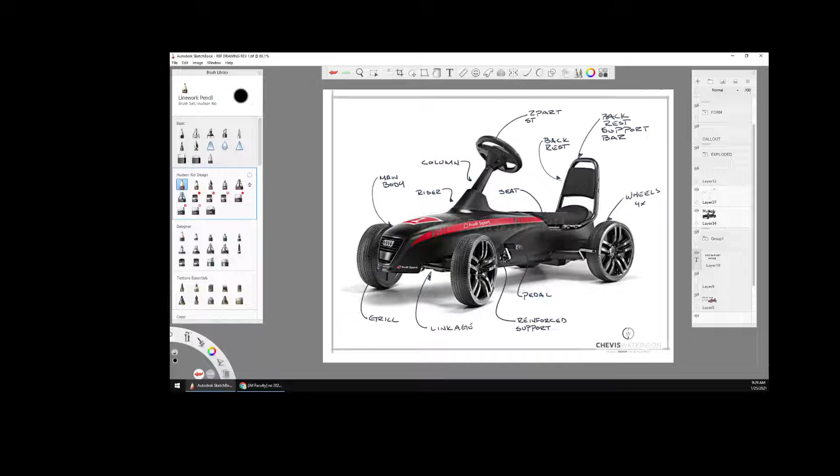as you model things, start keeping a logbook. So if this is your first time modeling this kind of a wheel, track your time from start to finish. The reason for that is, eventually if someone comes to you with something else very similar that they want to model, one of the questions is going to be, well, how long is it going to take, or how much is it going to cost?

And that's all equated to how long it's going to take you to do the model. If you have a reference book, you can go back and look and say, okay, I've done a wheel like this before, it took me about an hour. So that's the schedule I'm going to give, that's what I'm going to bill for.

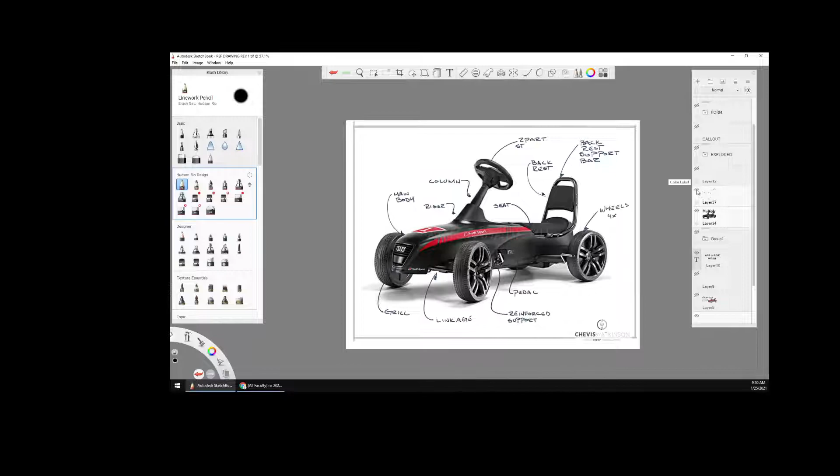Very valuable tool. Now, as we go on, what I'd like to do next is create a simple exploded view of all the components. Again, it's a nice, quick, simple thing I like to do. I don't necessarily spend a whole lot of time styling it or making it pretty. If I'm not putting this into a presentation deck, or if I'm just using it as a reference document, how much time do I really need to spend on it?

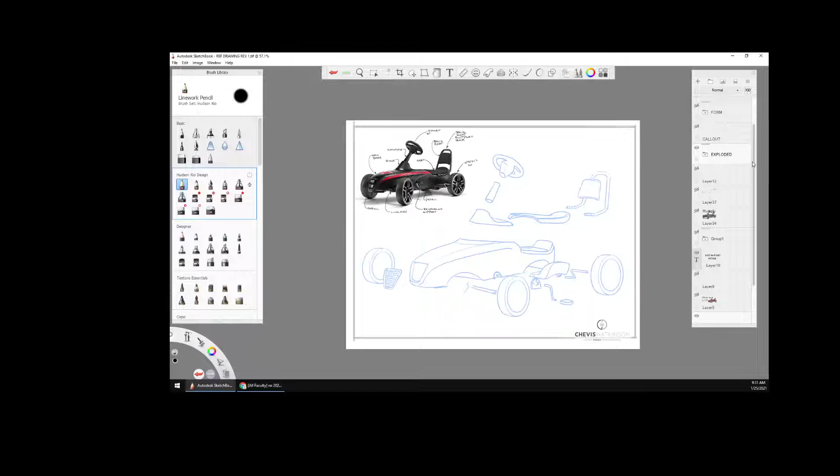So what I then do is, again, add the callouts. Now these callouts are different. What I want to know is what are the materials I'm using, what is the color, what is the finish, and potentially what is the manufacturing technique.

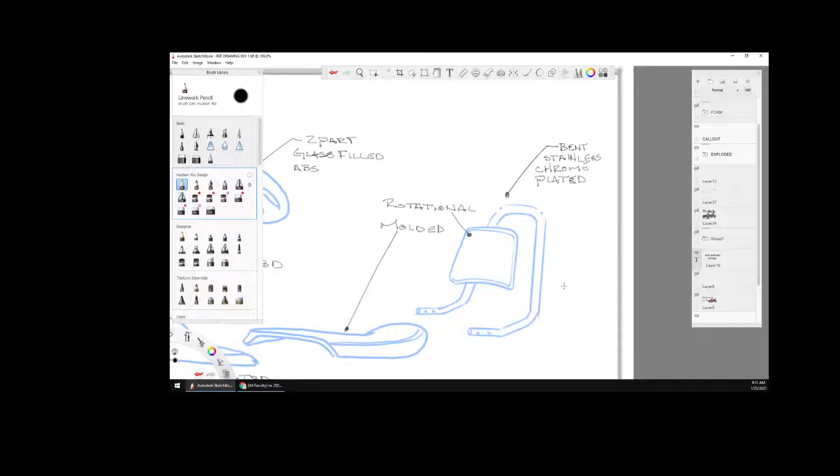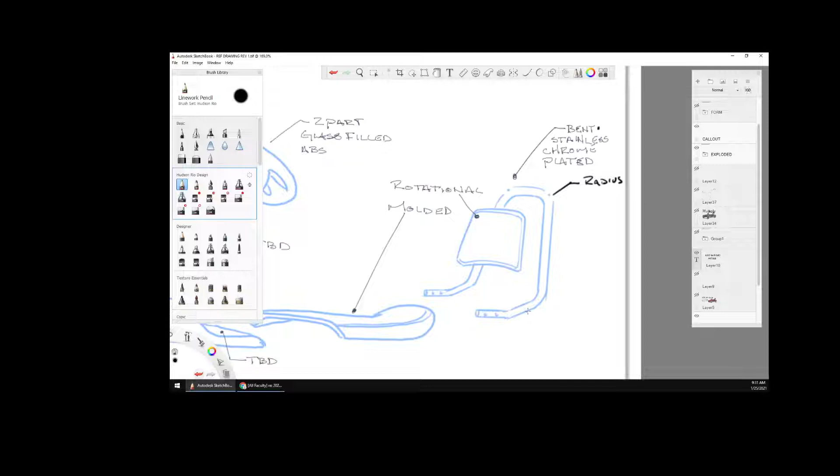Now, why this is important—let's look at this support bar here. If we look at that, we're saying it's going to be bent stainless steel, chrome plated. The reason that's important is that means we have some minimum radiuses that we are going to have to apply. We also want to know what the material thickness of the part is, which then equates back to what the minimum radius is.

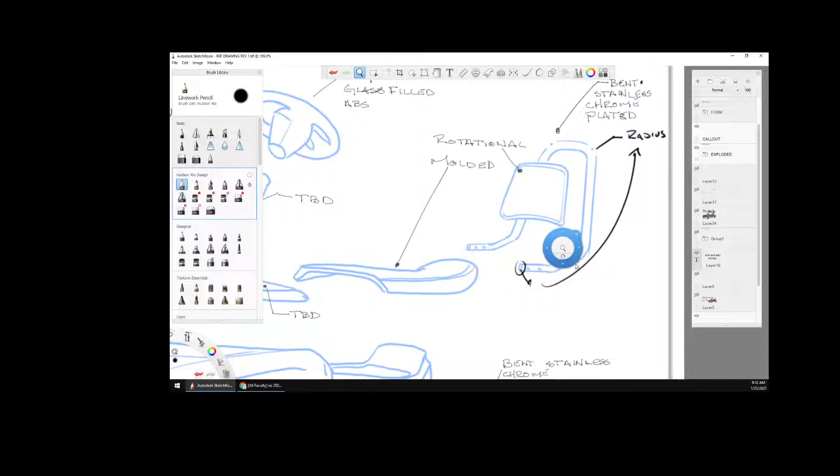If you don't know this information, or don't have it, you really want to interact with your engineers or even the manufacturer to learn that. This also sometimes applies to the styling. The first initial—we'll call it inspirational concept sketch—may not have taken that into consideration exactly. So when you do your radiuses, you want to understand how this affects the overall design. Either you're going to reevaluate it, or you're going to make some tweaks and adjustments, however it goes.

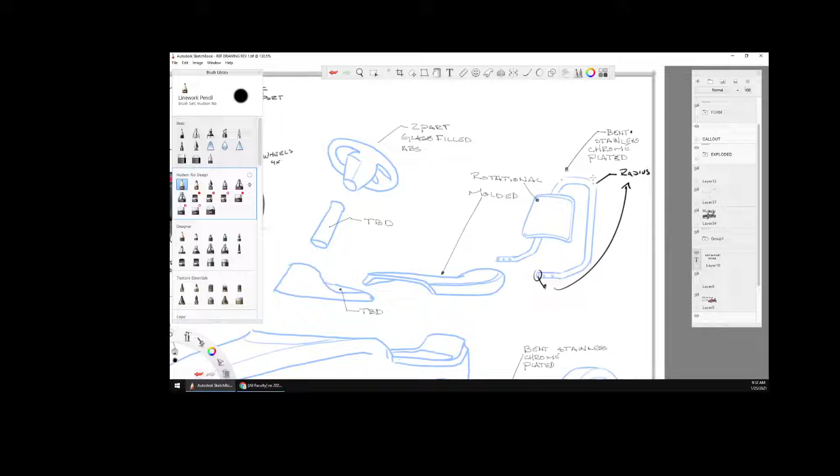So now that I've got all this documented and I know what I'm modeling, I like to start off by trying to figure out how I'm going to model it, or dissecting the actual part. So with that said, we are going to come down here. Let me just erase this—we don't need that.

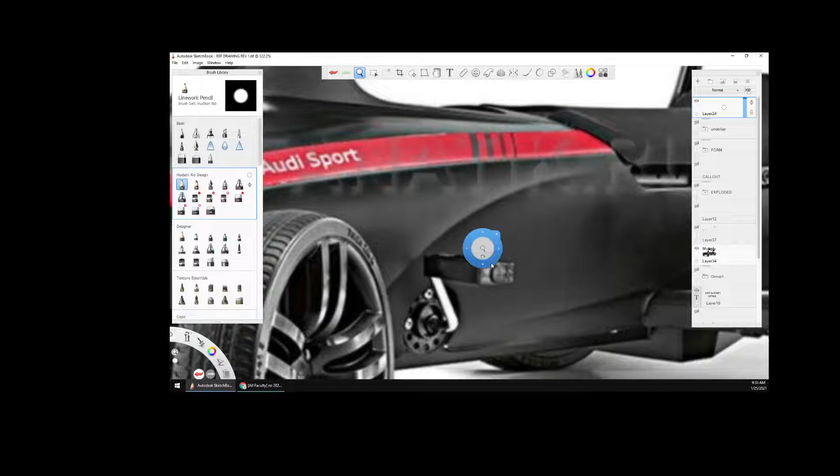And we're going to create our forms. I'm going to pull up my model again, and what I'm going to start to do is really dissect the form. So I can look here and I'm going to read this. This is where understanding highlights helps, and it's the same as the marker renderings that you've been taught or learning. You can see the darkest darks, lightest lights, which means that this bows out and then cuts under, because that's what the highlights are hitting.

So if I was to draw a cross section, the highlight comes from here, it's going to hit here and light it up, and then as it cuts under, you're going to see a shadow because the highlight's not hitting, or the light source is not hitting that.

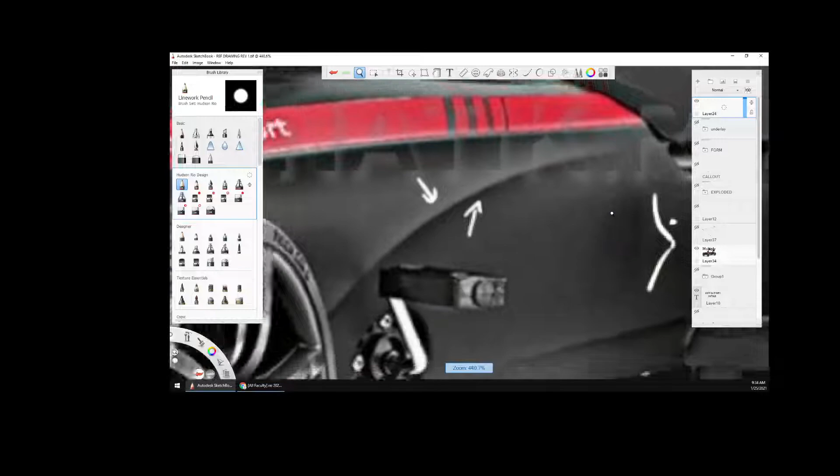With that said, the way I read this is for it to bow in a little bit. It's going to come out, go over a radiused highlight, cut back under. It appears as if there's a little bit of a bow here.

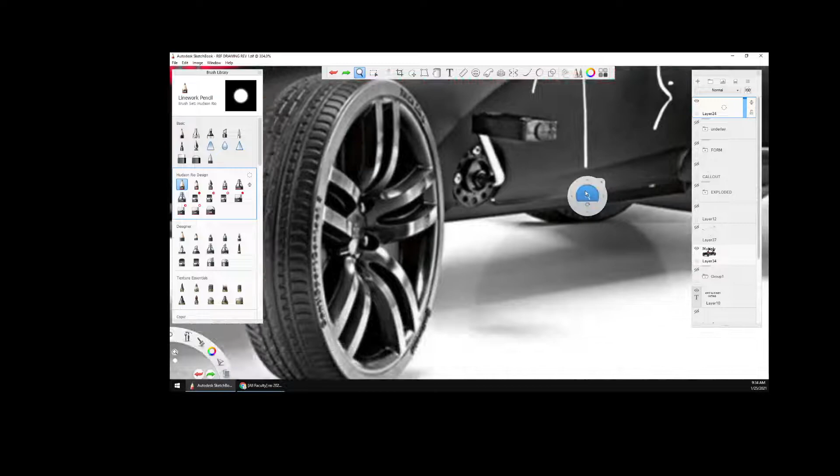Now, the reason I say it appears is I know it may not be a perfectly straight line, because this is also a structural element, and a slight bow in the part or surface is stronger than a straight line. So checking with your engineers if you don't have this knowledge really helps, because you may have to go back to the industrial designer, or you may need to modify your design to incorporate this. But as we get down here, you can see it curves, cuts under, and drops back down. That's going to be that highlight.

Now, what I do is create a series of these so I can best understand what's going on. Let's do another one here where it's going to curve under. You can see the curve based on the shadow, how much it transitions, is a little bit more back here. So let's go out, tuck out, tuck under, it looks like, and come down.

And I'm not worried about the other parts in there, I don't need that. Now, what this allows me to do is start looking at potentially how I'm going to build the surfaces, or what surfaces I'm going to build. So if I look at this, you can see that this has the potential to be the start of a surface, as well as, we kind of come up here.

And what this is going to help me do is determine what are the surfaces that I'm going to build primarily first, or secondary, or tertiary. We'll get more into that in one of the next episodes of this series.

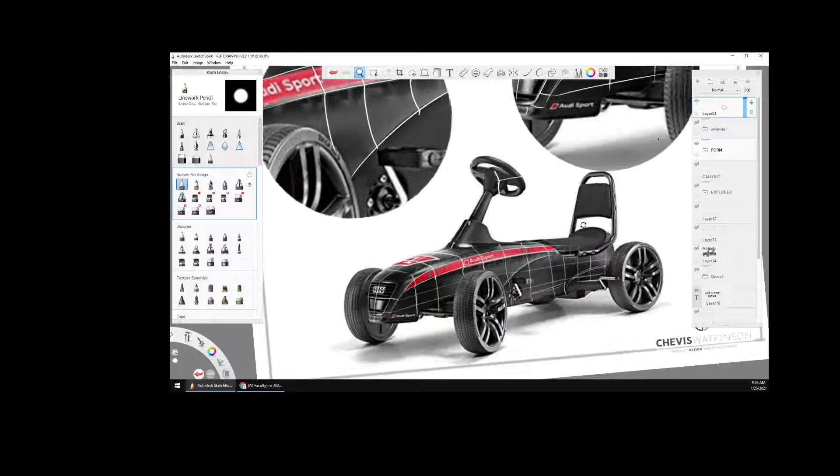So as I go through this, one of the things I do too is I don't just do the overall car. I will dive in close, really blow up some of the things so I can read the details better. And again, what this starts telling me is what are some of the potential surfaces I can build as I break it down.

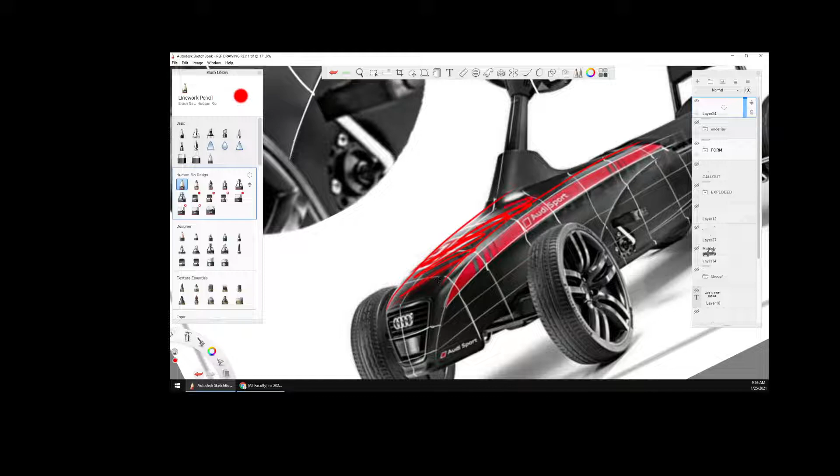So as I look at this, I may say, okay, I can see that this here is one nice clean surface. So I'm going to build this first, that's going to be one of my primary surfaces. Based off of that surface, I'm going to start building down the sides. I may come in and build all the way to the front and break this out as a separate surface to get that contour. Not 100% sure.

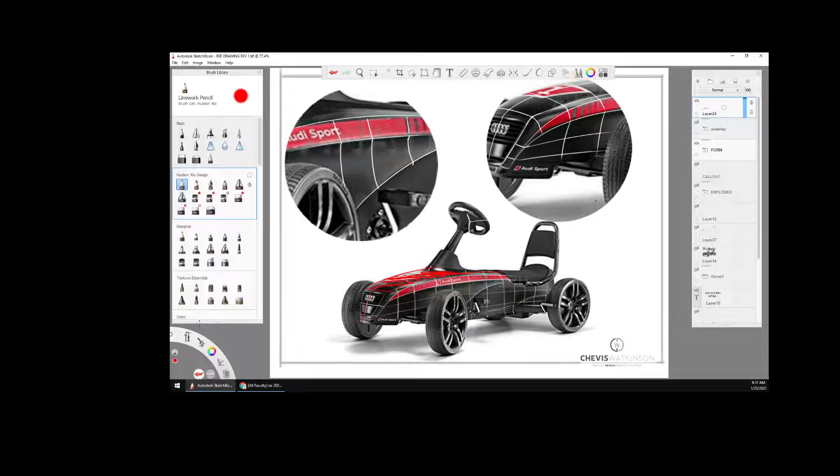Some of this, you can plan it all out, but once you start 3D modeling, you want to be prepared to modify and adapt. So again, this is just to get an initial thought.

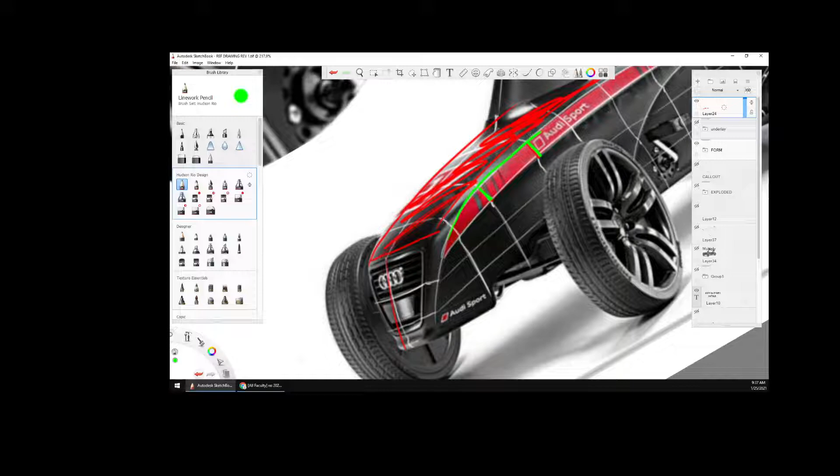I may want to build this surface because it looks as if there's a separate radius. Let me just sketch that so you can see it a little bit better. I may want to build this surface next because I usually like to build my primary surfaces first, and then do the transitions afterwards, such as radiuses and that. Because if I look at this, I kind of see a radius that goes in here and wraps down. So if I zoom in, I'm going to do that.

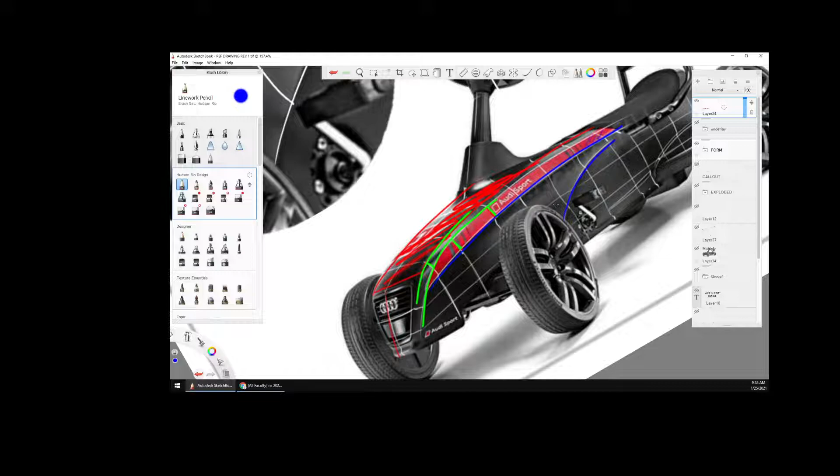Now, again, do I potentially want to build this surface next? Am I going to try to build this all as one, such as this, or am I going to want to try to break this out as two? Again, when we start modeling, I'll talk about my thought process and my methodology for determining that.

So now we've got this kind of defined on what we're doing, what the forms look like. The next thing I usually like to do is get some reference images to bring into CAD. So what I do is a quick rough layout. Sometimes you'll be given 2D drawings for your model, but if not, you want to create the 2D models. So what I'm going to do is create the front, side, and top view. I then can bring those images into my 3D modeling program and use them as underlays to create my curves.

So what we'll do is next time I'll have this all set up and we will dive into the modeling. I hope you're going to follow along with us.